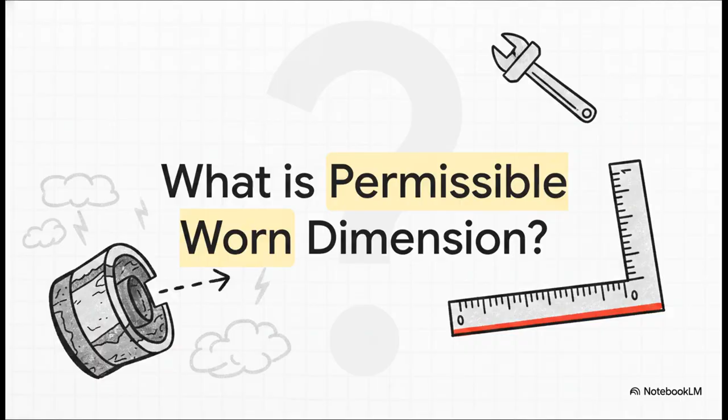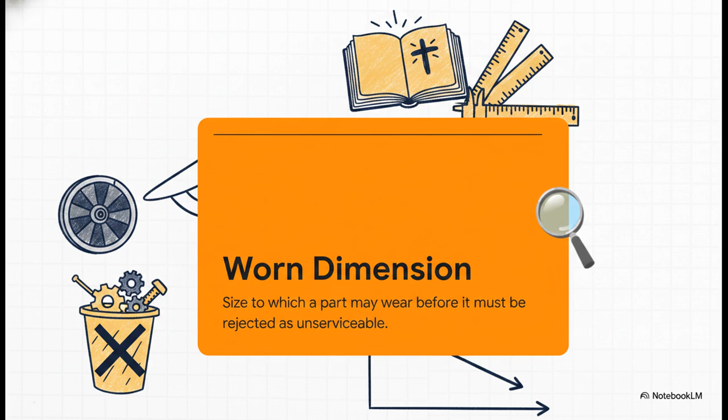Here's the deal. The permissible worn dimension is strictly the size to which a part may wear before it must be rejected as unserviceable. It is your absolute cutoff line before you toss that piece straight into the scrap bin. And where do you find these wear limits? Strictly in the appropriate repair overhaul manual. Those limits are based on rigorous engineering stress tests. That manual is your Bible on the floor. You never guess, you always look it up.

Moving on to Section 2, the basis of fits. Let's look at how these parts actually mate together on the bird. You're going to hear a lot about the hole basis and the shaft basis. The distinction is pretty straightforward. The hole basis is a system of fits relating to the basic or nominal size of the hole. The shaft basis, on the other hand, is a system of fits relating specifically to the nominal shaft size.

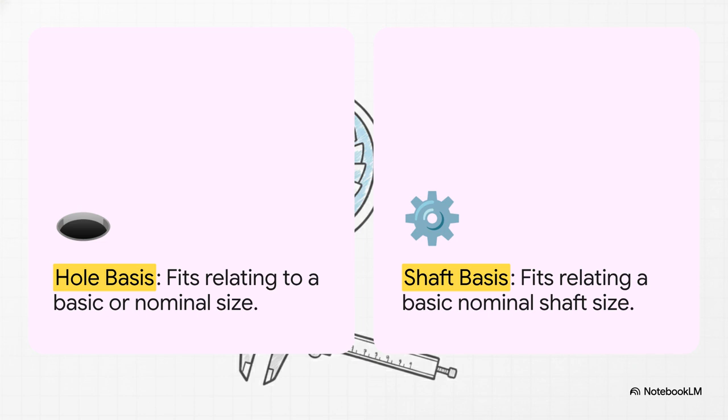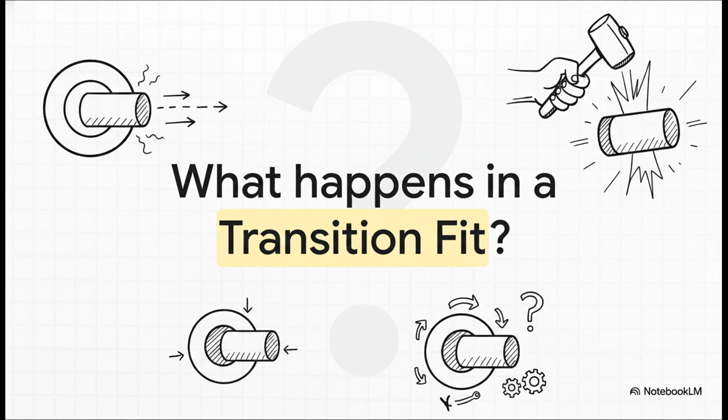Out here, we mostly use the hole basis in manufacturing. Why? Because it is just so much easier and cheaper to machine a standard hole and then slightly vary the shaft to fit into it. So knowing that, visualize you're working at the bench. You've got clearance fits, where parts just slide together easily, and interference fits, where you really need some serious force to mate them. But what happens mechanically when you're working with a transition fit?

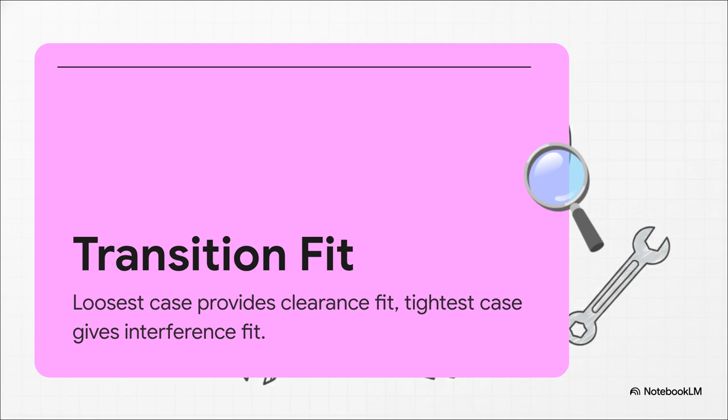Well, a transition fit is that tricky middle ground. The loosest case gives you a clearance fit, but the tightest case gives you an interference fit. Mechanically speaking, we use these when exact dead-on alignment is absolutely critical, but we might still need to take it apart someday. So depending on the exact machining tolerances, you might just slip it in by hand, or you might need to tap it in with a mallet.

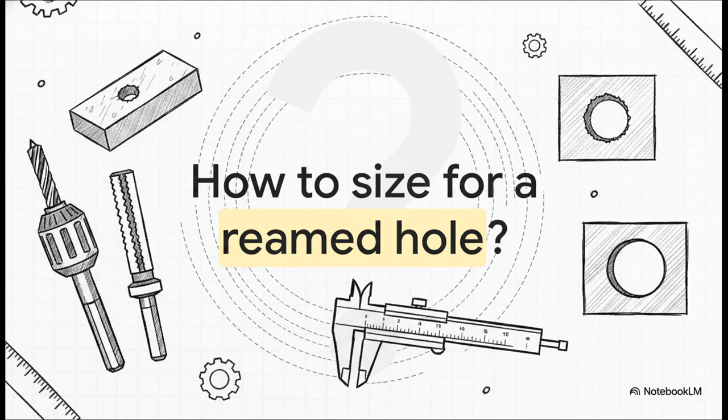All right, Section 3, precision drilling and reaming. Let's put the manuals down for a second. Grab your tools. This is where your hands need to be as precise as your eyes. I'm going to test your actual procedure here. If you need a perfectly sized glass-smooth hole that requires a reamer, how do you size the initial drill bit you plunge into the metal before you ream it?

Here's the golden rule of the shop. If a hole is to be reamed, it must be drilled slightly smaller than its nominal size. You always drill slightly undersized. Why? Because the reamer isn't a drill, it's a finishing tool. It needs actual material to shave off the walls to get that perfect, precise finish and final dimension.

If you just drill it to nominal size right off the bat, the reamer has absolutely nothing to bite into and you've ruined the tolerance entirely.

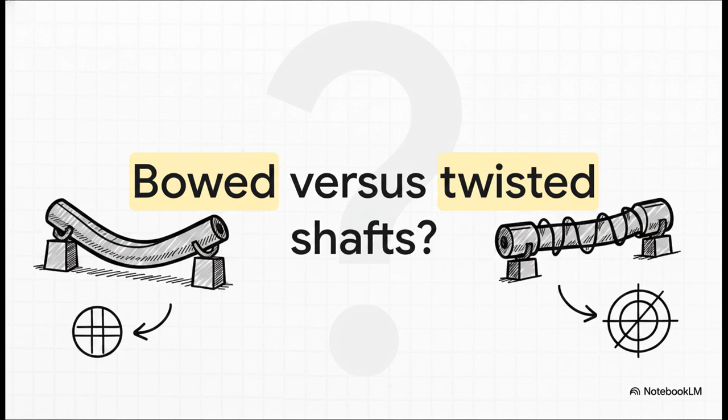Next up, Section 4, shaft twist and bowing. Keep your safety glasses on and come over to the inspection bench with me. We need to look at some heavy structural deformation. Take a look at these damaged shafts. Now, don't just tell me they're broken. I need you to distinguish the damage. Mechanically speaking, what is the exact difference between a shaft that is bowed and one that is twisted?

This brilliantly illustrates the basic physics of aircraft loads. If the center line of the shaft is no longer straight, the item is bowed. Basically, it's been bent off-center. On the other hand, twist is the direct result of applied torsion on the shaft. Bowing comes from a lateral load or a hard impact, while twisting comes from excessive rotational force. Two completely different forces causing two completely different types of damage.

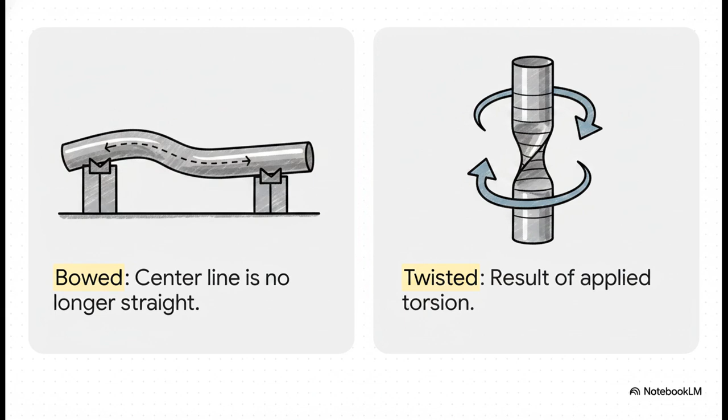Now, think about the metal's elasticity. Say you see a shaft under massive rotational load, and it's physically twisting. But the very moment you remove that heavy force, the twist in the shaft entirely disappears. It just snaps back to normal. What does that tell us about the load that was applied? Well, it tells us we got incredibly lucky.

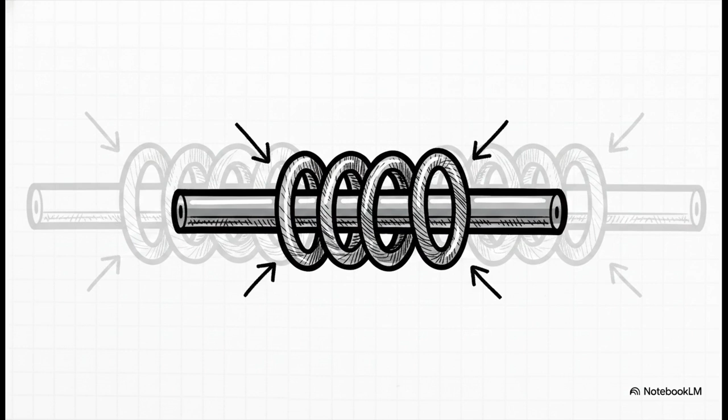If the twist disappears entirely, then the shaft was loaded below its elastic limit. The metal's molecular structure essentially acted like a giant spring and just bounced back without suffering any permanent plastic deformation.

But listen to me, we never just rely on luck or eyeball it to see if a shaft is permanently deformed. When you need to measure the exact amount of twist in a shaft to see if it is still within legal limits, you use a strain gauge. Lock that into your memory right now. Torsion equals twist, and twist is measured with a strain gauge.

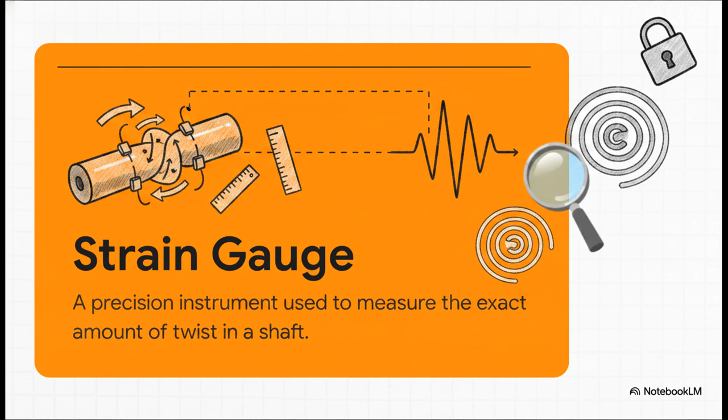Almost done. Section 5. Wear and concentricity checks. All right, apprentice, we are entering the final phase of the shift. Time to separate the amateurs from the pros. We've got a heavy jack screw assembly sitting right here. These things take an unbelievable beating adjusting the stabilizer. So what specific precision measuring tools do you need to go check out from the tool crib right now to examine this jack screw for wear?

You literally cannot eyeball a jack screw. They are examined for wear strictly with a micrometer or a vernier caliper. The reasoning is pretty simple. The thread profiles wear completely unevenly under constant aerodynamic friction. You have to measure down to the thousandth of an inch to ensure those threads won't just shear off under flight loads.

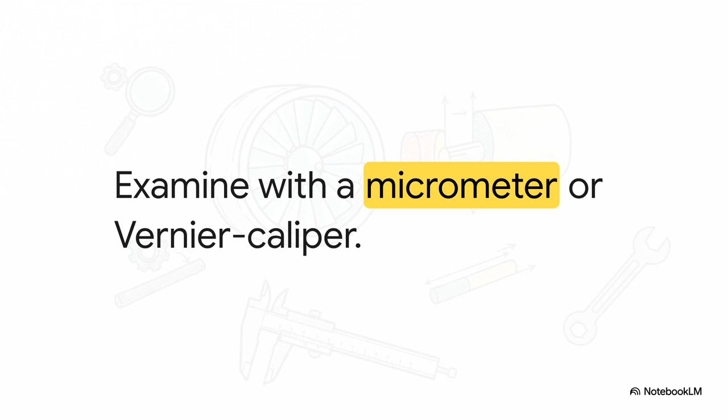Okay, here is your final test before I let you loose on the actual floor. We need to check if a high-speed shaft is running perfectly true or if it's wobbling. What is the exact step-by-step physical procedure for testing the concentricity of a shaft on the bench? Do not skip a step here, okay?

Concentricity is tested by first placing the shaft in V blocks, or between centers. This isolates the shaft and provides a true datum reference. Second, you rotate the shaft slowly entirely by hand. Third, you read the measurements under a dial test indicator. That indicator is hypersensitive. It'll show you exactly how much runout or wobble you have as that shaft completes a full 360-degree rotation.

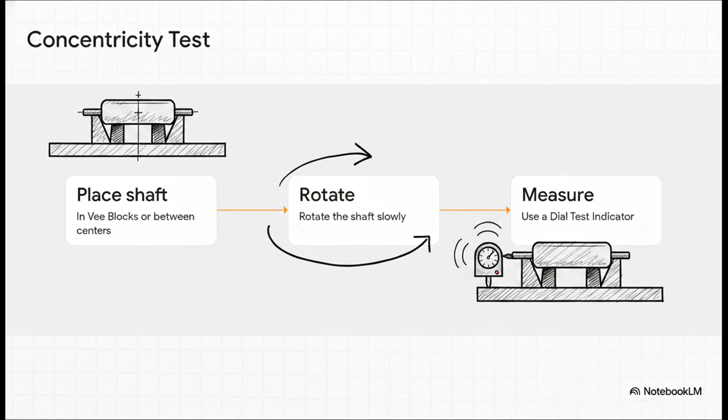We covered a ton of ground today, everything from basic dimensional tolerances to measuring twist with a strain gauge, all the way to checking concentricity with a dial test indicator. Remember, these aren't just answers you bubble in on an EASA B1 test. These are the cold, hard engineering realities that keep an aircraft from falling out of the sky.

Grab your micrometer. Are you ready to trust your measurements when a flight depends on it? Because out here on the hangar floor, that is exactly what you have to do every single shift.